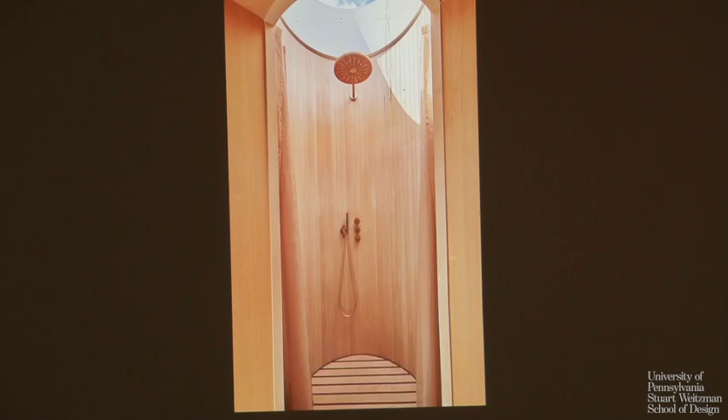It's essentially a piece of decommissioned infrastructure that has now become the home of my family in Copenhagen. I spend 3 months of summer on the houseboat, and I sit here where cars used to park, and I look out. I see the sun setting over the King's Palace, and in the morning I see the sun rising over CopenHill, the waste-to-energy power plant that we built, which makes me feel like a very significant citizen in Copenhagen.

And CopenHill is, as Rosanna mentioned, a waste-to-energy power plant that is so clean that the steam coming out of the chimney is cleaner than the air of Copenhagen.

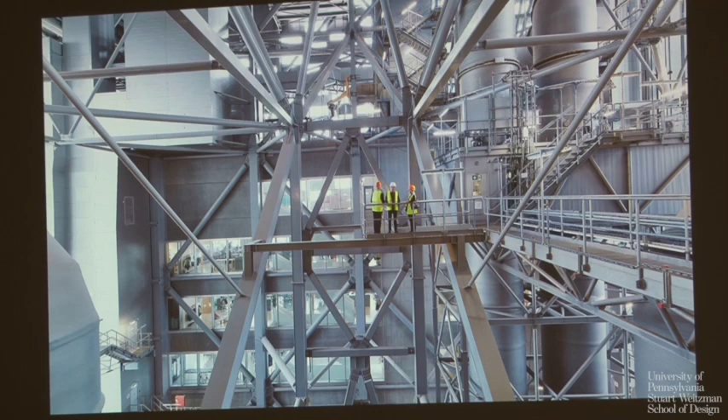So we have been able to turn its facade into the tallest man-made climbing wall in the world. You need to be a pretty skilled climber. You can also ride the elevator inside and admire all the technology that scrubs the particles from the air, and get to the roof, which is a man-made mountain meadow where you can hike and downhill ski.

Denmark got 0 medals in Sochi and in Beijing. I hope eventually we can change that statistic now that the Copenhageners can practice at home.

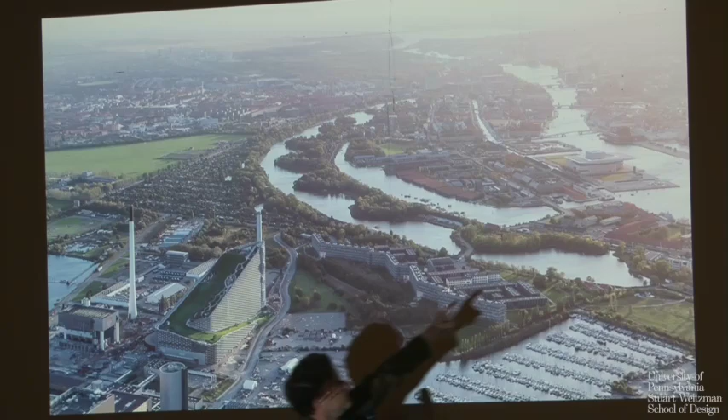And then it's really a substantial part of the landscape of Copenhagen, and this is my home. I like this idea that one of the 2 main landmarks of Copenhagen is the Little Mermaid, and the other one is a facility that turns the waste of society into clean energy and district heating, and that you can hike and ski on.

And it's part of this idea that Rosanna also mentioned that we call hedonistic sustainability. Essentially, the sustainable city or the sustainable building is not only better for the environment, it can also be much more enjoyable for the people that live in it.

And it's an idea we stumbled upon with our first project a quarter of a century ago. We opened the Copenhagen Harbour Bath, and on the opening day we saw the citizens of Copenhagen jumping into the water in the middle of the city. They didn't have to drive their cars for hours to get to the Hamptons. They could actually jump in the port in the middle of the city.

And we designed the harbour bath in Aarhus, and it became clear that a clean port is not only nice for the fish, it's also amazing for the citizens of that city. And it became this idea of hedonistic sustainability that we've been pursuing in various ways ever since.

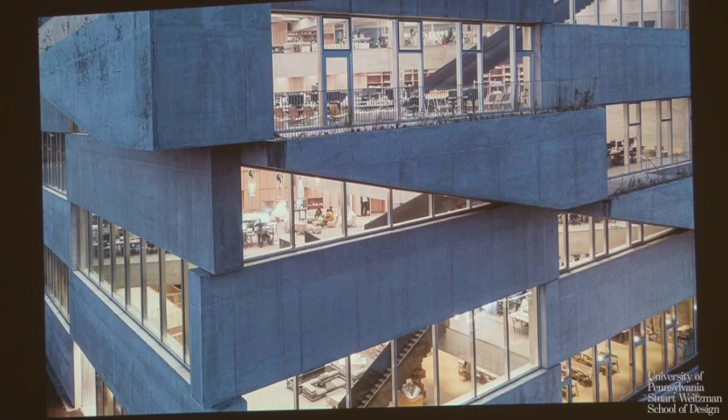You can walk, and people from the neighborhood come and they climb the building, and they end up sometimes on our roof terrace, which is fine. Eventually, sometimes we need it ourselves, but it somehow makes it part of the urban space. And inside, we try to imagine what kind of a work environment would we like to have. We came from a large Carlsberg factory, a beautiful space, tall ceilings and one level.

Here we have a footprint of less than 10,000 square feet, so we'd have to be at least on 5 levels, but we decided to make it 7 levels. Each floor has a third or half open space, open to the floor above or below, so throughout the entire space you can always see your colleagues beneath you and above you.

A good environmentally performing envelope in Scandinavia would be roughly 40% transparent, 60% opaque, to avoid excessive heat loss or thermal gain in summer. Normally that becomes a diffusion, a dither of open and closed small windows. Here you have these 60-foot long panoramas, and then 60 feet of pin-up space, except maybe that one.

As you travel up through the building, you get these incredibly framed views of different scenes from the city, like here looking at the windmills and the bridge to Sweden. You can see the diagonal of the terraces traveling up along the building. The floor plan is 120 by 120 feet, and because it's wedge-shaped, one of the facades is only 60 feet, but that meant the diagonal spans, some of them, are more than 120 feet.

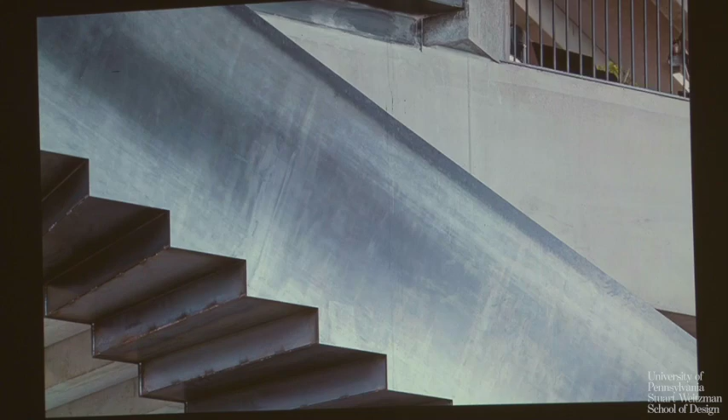All the stairs and guardrails are made out of hot-rolled steel, and you could say there's almost a fatwa against paint and drywall in the building - every material is what it is, chosen for what it's good at. So the building becomes this constellation of materials that have color and texture, with tectonic evidence of the different processes used to manipulate and process it. On the journey up through the building, you always have the north wall, the wooden shelves with all the support functions.

And you end up with these kind of framed views of the surrounding city, where you can see that you are in a living, breathing, dynamic space of a port. And of course the warmth of the shelf as this continuous element to the north, where you have all the cold light, you have the warm material.

You can see the model workshop. It's probably one of the nicest model workshops, at least in Denmark. Sometimes you find them in the basement - here it has sea views, the container port, and finally on the roof.

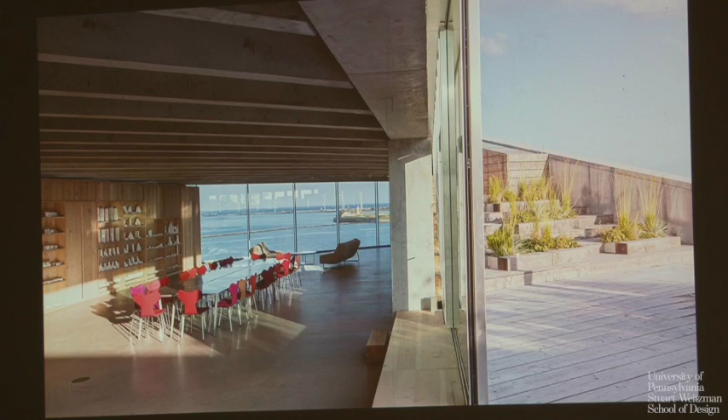Originally, I was planning to live here in the penthouse. My girlfriend hated the idea of living on top of the work. She may have had a point, but when she saw it finished, she probably regretted that. So instead, it's now a space we keep for special projects or special happenings.

We try to not just plaster it with desks. And since we are an architecture school, another little nerdy detail: normally you would prioritize level-free access to the outside, but because we are hitting the maximum envelope, we decided to keep it simple. So we put all the insulation on top, which means you have a window the height of a lazy bench that you walk into, and also a bookshelf underneath.

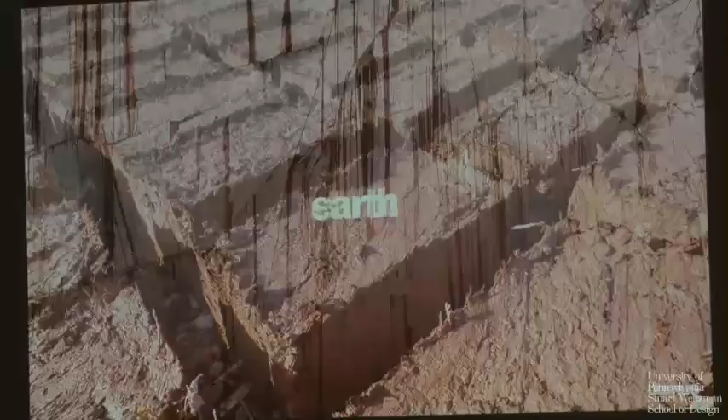The year will be a journey through stone, earth, concrete, metal, glass, wood, fabric and plastics, plant, and then resource — the idea that sometimes we mine the built environment to make new built environment — and the immaterial. We thought it would be strange and anachronistic to make a whole season without touching on AI at any point.

And maybe just as a teaser — it's kind of funny, I was speaking with Winka before about this — maybe it's also the fact that if I had been given a guest editorship when I was in my 30s, I would have tried to put my own projects into every issue. But I think the fact that I'm now at this next stage in life, it has been such a joy to look out into the world, as we always do, and actually identify things that captivate us.

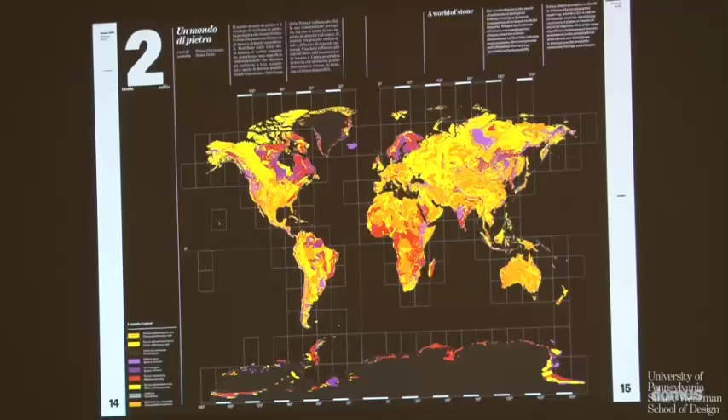So the issue has this kind of genealogy of the use of stone, some of the most interesting current uses of stone, a map of the world seen through the lens of stone, and a library of the different stones and characters.

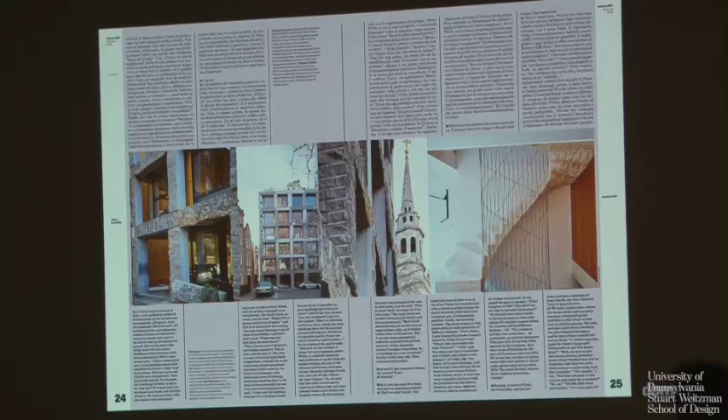Steve Webb, the engineer, talks about the use of structural stone in contemporary construction. I went to visit Amin Taha and Groupwork—an incredible practice in the UK. Their Clerkenwell building, which is also their offices, has a load-bearing structural stone facade, and they're basically rediscovering stone as almost carbon-free.

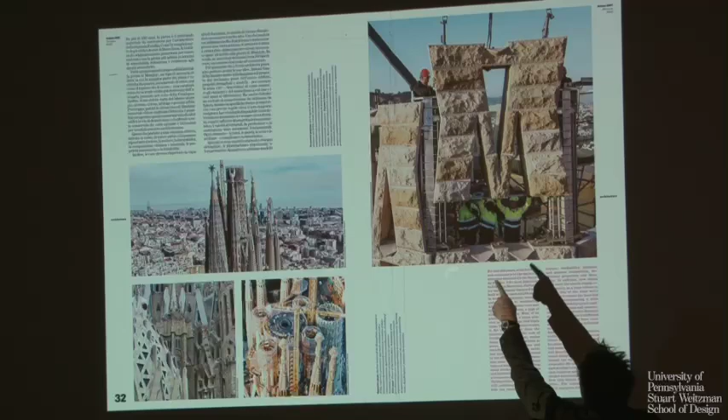If it's locally harvested and you use electrically powered machines to harvest it, it has almost no carbon footprint. I went to visit the construction site of Sagrada Familia, which is, of course, the oldest building but still under construction. Today they're using pre-tensioned solid stone as construction. During the 70s, there was a moment where they built with concrete—it's definitely the most beautiful construction site I've ever been to in my life.

This French architect, Perraudin, who built in a kind of classic modernist vocabulary, but using solid stone as the load-bearing material.

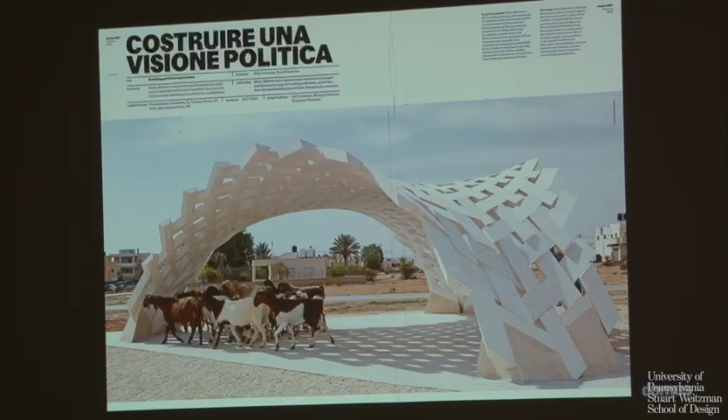Stone Matters, a Palestinian group that uses solid stone, and Jerusalem stone, which they believe has become a political element in Israel, the West Bank, and Gaza. Again, it's about using sophisticated technology and radically different geometries to use stone instead of steel or concrete.

A Polish graveyard made with stone bricks, a beautiful square in Italy, and two contrasting projects—one that takes advantage of the raw, unformed nature of the material, and the other that uses sophisticated technology to create this incredibly organic, almost Art Nouveau result.

We commissioned 10 photo essays by Laurent Guénitou, the photographer, who in this case documented the journey of the pink marble for the Perelman Performing Arts Center for Rex. This is my old friend and colleague Joshua Ramus from Rex. When I saw his facade, I said he managed to turn his OCD into a creative outlet.

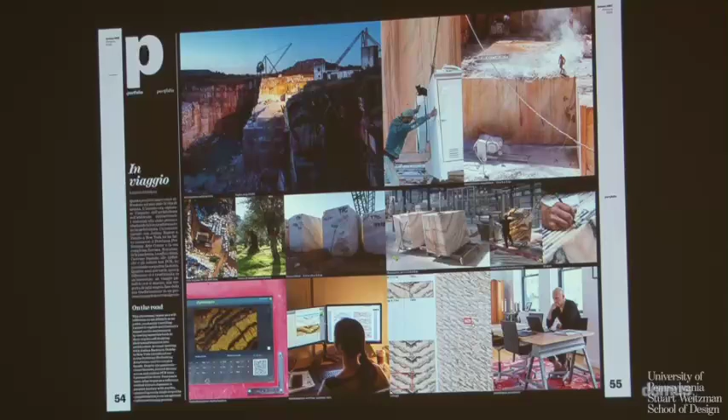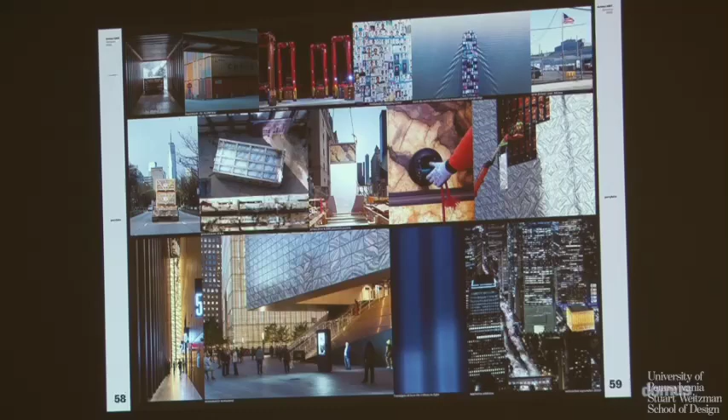Essentially, the stone has been harvested, it's cut so thinly, then it's photographed with front light and backlit. It's organized into these patterns, which is where the OCD becomes handy. It's then laminated between layers of glass, laid out in panels, sailed across the Atlantic Ocean, and driven into Manhattan—now a spectacular, beautiful little building between the legs of the World Trade Center towers.

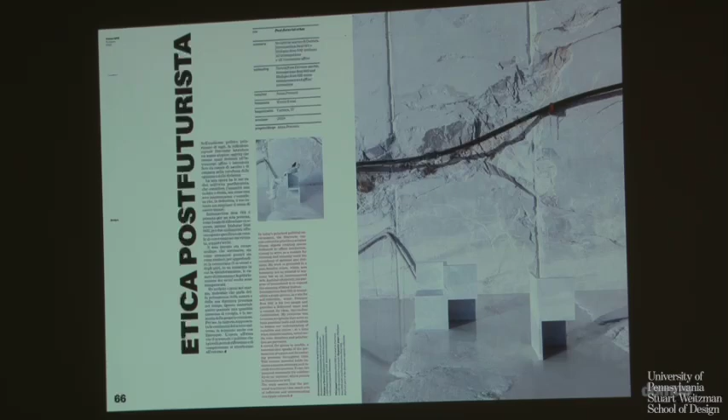By looking at the stone and manipulating it, it gets this kind of almost surrealist nature. And finally, since material is the subject and the protagonist, we thought the cover should be a celebration of the material. We ended up persuading Domus to make the cover just a photograph of a gorgeous piece of stone. Then, in the absence of graphics, the title of the magazine is engraved like the Ten Commandments into the surface of the stone.

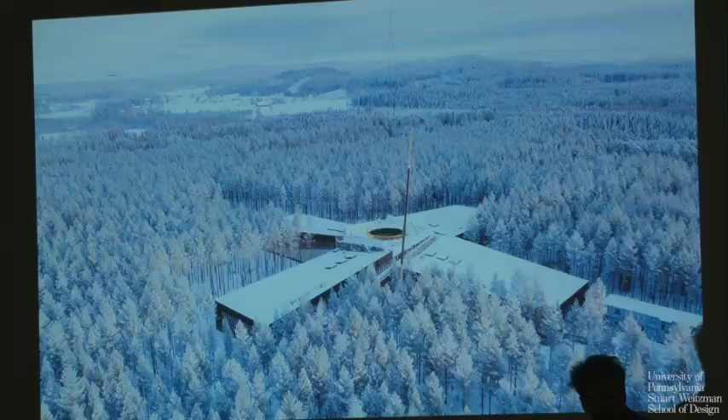So maybe back a little bit to some of the work we do. We've never been very materialistically fundamentalist in our practice, but we, in the pursuit of trying to enhance the environmental performance of our buildings.

One consistent pursuit lately has been the use of timber. In the absence of other solutions, there's also advances using cave bacteria to digest limestone into cement instead of energy-intensive furnaces. There's a lot of movement happening in carbon-free steel, carbon-free concrete, etc. But right now, the simplest way to reduce the embodied carbon footprint of your building is to make it out of wood.

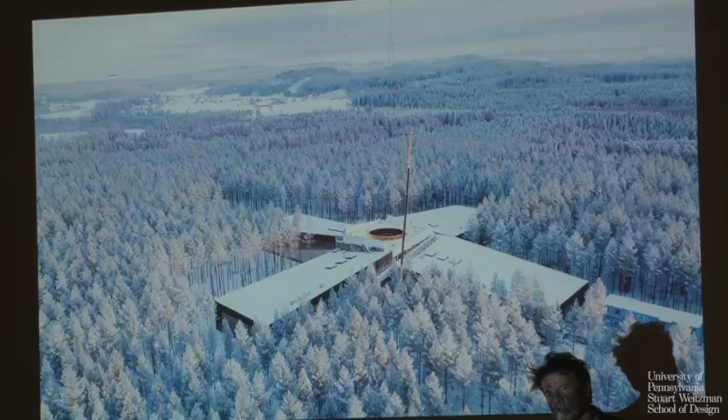We built the Plus in Norway, which we believe we have a claim to being the most environmentally friendly factory in the world. It's made from locally sourced timber, charred on the outside for weather protection. We negotiated with the fire department that we didn't have to cut down more than 15 feet offset around the building, so we can actually use the evergreen pine trees outside as sun shading for the facade.

So the factory workers are making outdoor furniture for the Vestre furniture company inside a forest. The factory makes woodwork and paint, so the two materials you see are color and timber. And this is not a veneer or a finish—it's the load-bearing walls, the load-bearing columns, the beams, the slab of the roof. So what happens when you build a building out of mass timber is that the bones of the building, the raw structure, is already beautiful.

The administration is located around the central courtyard, and the building is actually part of the whole factory complex. It's publicly accessible, and you can climb the roof and descend into the courtyard and see everything they do inside. They said they're not afraid of industrial espionage, because if people start copying them, then the industry is going to get more clean.

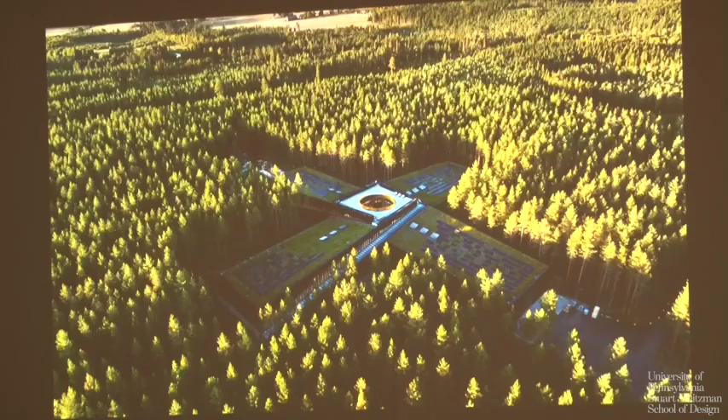The roof is covered by a mixture—the building is heated and cooled with geothermal, powered by local hydroelectricity, supplemented by photovoltaics. The roof is covered in locally sourced turf, and we literally moved the ground cover to the roof, including elements that make it successful as habitat. So it has the same amount of habitat after the building was built as before.

Around the corner on the Arctic Circle in the north of Sweden, we built a one-room hotel, or actually a one-room hotel for humans and 350 rooms for birds and bats. It's a tree house, and we worked with a local ornithologist who gave us a perfect index of the different birds and bats that breed in the area, and then gave us the respective designs.

There's 17 different kinds of birdhouses for the different birds. So you wake up to the tweeting of birds, you shower with a squirrel, and you are surrounded by nature around you, beneath you, and above you. It's even ADA accessible because we're taking advantage of the slope of the site, so you can just roll into it.

So a project like that, of course, doesn't really make a dent in the global carbon footprint, but maybe this project has more significance in terms of a declaration of love to nature.

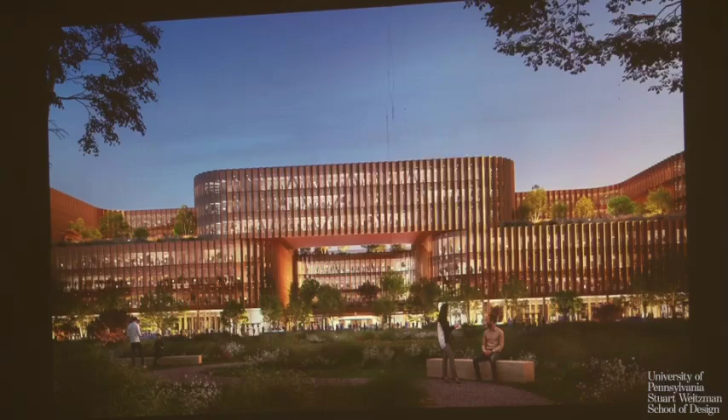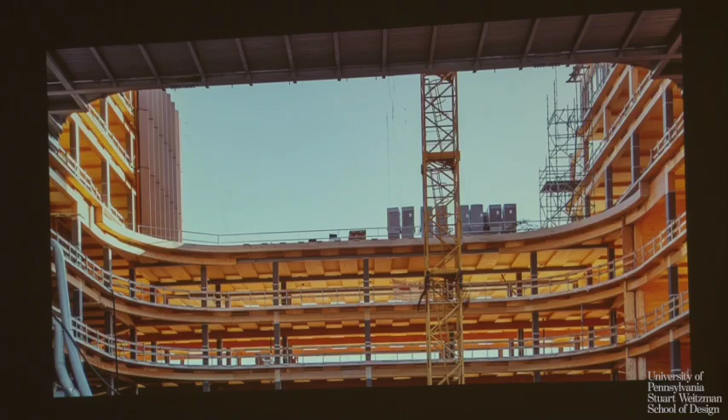On the other end of the spectrum, we're just finishing an extension of the Luxembourg airport. These are renders—it's a 900,000 square foot building that's built 80% out of mass timber. For anti-terror purposes, the ground floor had to be concrete, but everything above is timber. It's this kind of 80-20 approach, where timber is great for a lot of things, and again, you have these gorgeous exposed ceilings.

The columns are actually timber, but they're just covered by cardboard to protect against the weather. But because you have these long spans over the courtyards, 3 levels that span across a courtyard opening up to the tarmac, some of the members became too girthy in timber, so they've just been surgically replaced with steel.

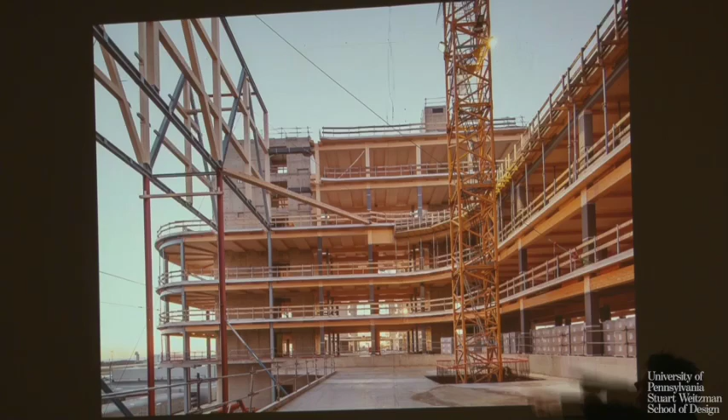So you can see that most of it is timber, but in the beam, the bottom has a lot of tension, and some of the diagonals that have an abundance of tension have simply been replaced—almost like a pirate with a wooden leg—simply because in that case, steel was better at the job.

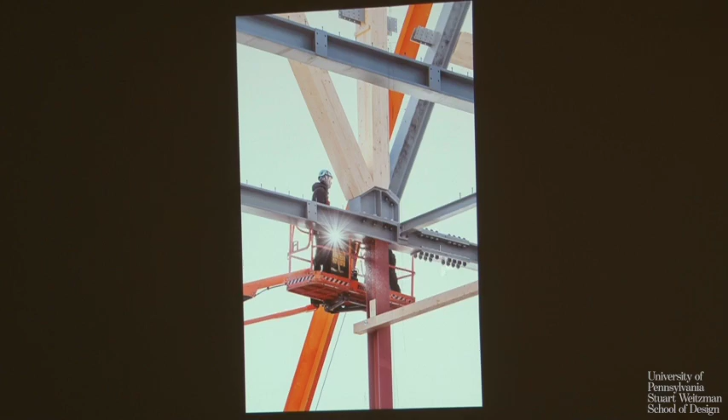I think this pragmatic approach actually allows us to make a very large-scale timber building, where for necessity, vertical egress cores and the ground floor are concrete, a few members have been replaced with steel, and the rest is essentially an enormous timber structure. Building on that experience, two years ago we won the competition to design the new airport in Zurich, which will be the largest timber structure on planet Earth.

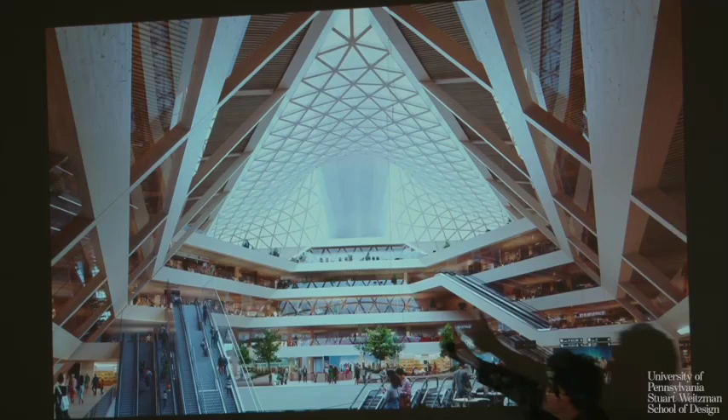I would call it timber brutalism, because everything is kind of this heroic space frame grid that you walk through as you travel through the terminal. The dimensions are almost 3 by 3 feet, locally sourced pine, and the only thing that isn't timber is the control tower that stands like a campanile in the middle of this three-dimensional space where all the different flows of people pass each other in 3 dimensions. The control tower actually lifts up the skylight, so the skylight becomes the control tower. And the roof is covered in photovoltaics, powering two-thirds of the airport.

And of course, as an architect, you're always nervous—what vicious nicknames are they going to come up with for your building? But in this case, it's the espresso coffee pot, which I think is nice if you like coffee.

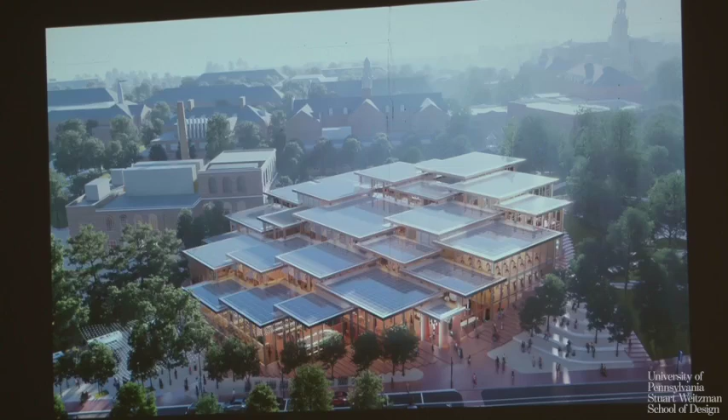And in this case, you saw the photovoltaics on the roof, which I think is about finding ways to integrate active power production as an element of the project—a challenge that I think as architects we should take on our shoulders, to find aesthetic ways that these environmentally performing elements don't just become sophisticated machinery on a technical roof. They actually become integrated in the energy performance, but also the aesthetic performance of the building.

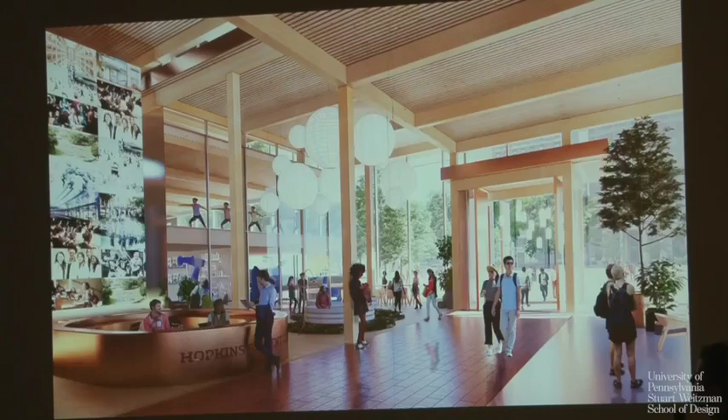For Johns Hopkins in Baltimore, we're designing the student campus center that just topped out, which is essentially a series of timber tables with photovoltaics on top, climbing a 4-story hill. So it's a 4-story building where every level is directly connected to the outside. You can enter it from any angle, from any elevation. And inside, the timber not only dramatically reduces the embodied carbon footprint of the building, but also becomes this beautiful, light, almost cozy environment, even though everything you see is actually the load-bearing structure.

There is no material finish applied. Everything is hard-working pieces of timber.

For Google, we created a few pavilions for their headquarters in Mountain View. The beautiful landscape, when you look closer, is actually a series of root zone gardens. So all the wastewater, all the rainwater that falls on the building is captured and used to irrigate the landscape. And all the black and gray wastewater from the building goes through these root zone gardens before it's let clean into the San Francisco Bay.

The roofs are covered in photovoltaic panels. The Googlers call them dragon scales. But essentially the entire material of the building is converting photons to energy, except for all the clerestories.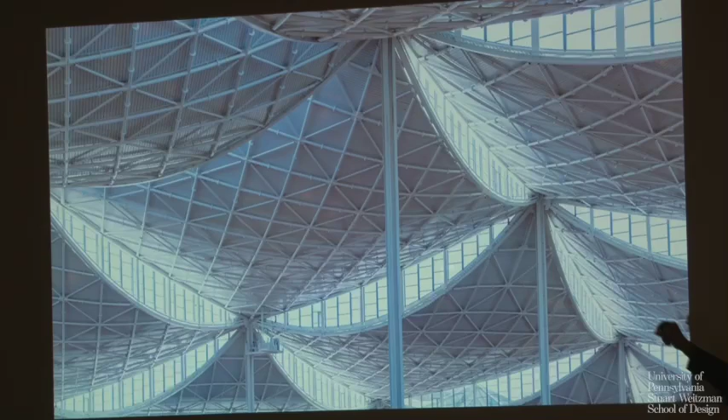The structure, the steel structure, is a grid shell that has a catenary curve, because the catenary curve is the most materially efficient way to deliver a long span with minimal use of material. That's why the roof can be so incredibly thin—it's basically just the insulation. And the smiles, these clerestories, are proportioned to bring in the perfect amount of daylight for this kind of marketplace for engineering and creativity.

And maybe lastly, around the corner in Vegas—you wouldn't normally associate Vegas with environmental performance. Although in Vegas, we learned, they basically have an abundance of solar energy with solar farms in the desert, and then of course they have the Hoover Dam.

So our original idea was to cover the entire—this is our proposal for the Vegas A's, the baseball team that used to be the Oakland A's, now moving to Vegas. We actually spent 5 years of our careers designing their headquarters, their ballpark in Oakland. And after 5 years, they couldn't reach an agreement with the city and moved to Vegas.

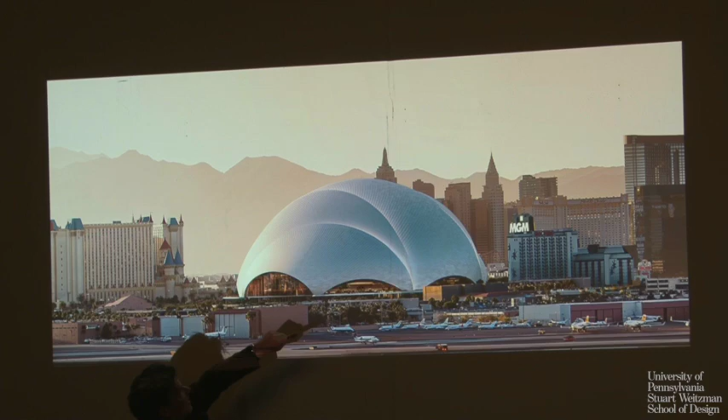It has to be enclosed, so we designed it like this kind of arched dome, so you get height for the baseball, you get these materially elegant spans. To the south, it's entirely opaque. To the east and west as well, and only to the north you have these arched pennants or ribbons that open up, allowing daylight, cool daylight to come in, allowing views from the strip.

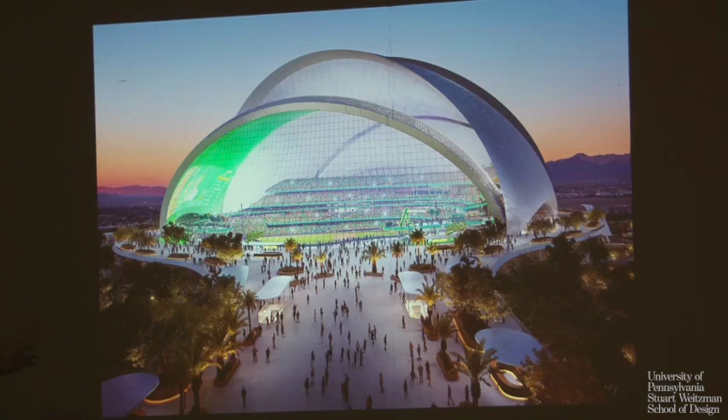You have MGM, Excalibur, and Hotel New York-New York, that can actually see the energy on the field. And from the inside, you get this enormous framed view where the energy from the strip can come in and be part of the experience inside.

So somehow the architecture—I like to say that it looks like the sphere swallowed the Sydney Opera House. The architecture is essentially designed to keep the relationship with the environment, get the daylight in, but omit all of the thermal exposure and glare.

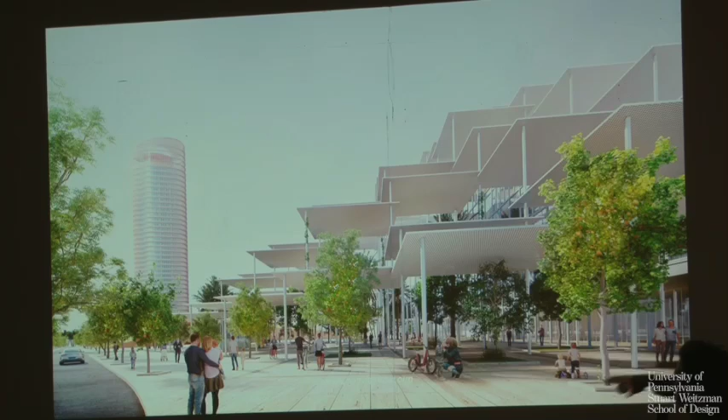The last one is for the European Commission. We're designing, as part of the new European Bauhaus, the environmental agenda of the EU and the built environment. We're designing the Joint Research Center for Environmental Construction in Sevilla, the sunniest and warmest city in Europe. It's half public square, half European Commission, essentially a cloud of shading pavilions that shade an outdoor square, naturally ventilated, with water elements to provide evaporative cooling.

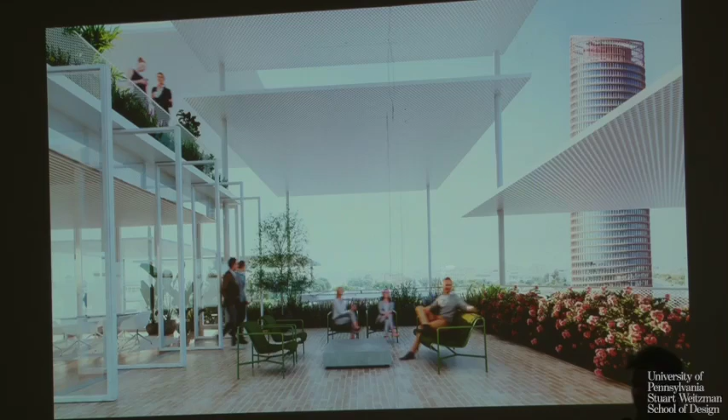But it allows us to make the entire facade transparent because the square is already shaded. There's an abundance of daylight, but no direct solar exposure and glare, so you can actually see what the commissioners are doing inside, and you get enjoyable outdoor spaces. As a result, the building produces twice as much power as it consumes, so it's actually part of the energy utility company of the city.

A year ago, I had the honor to speak at the Vatican as part of a European engagement with the Vatican, and Ursula von der Leyen, the president of the EU, met with the Pope. And if you ever get invited to visit the Pope and wonder what to give him, he already has a framed photo of the Joint Research Center.

I'm not a Catholic, but if I was, this could be my ticket to go to heaven. And maybe...

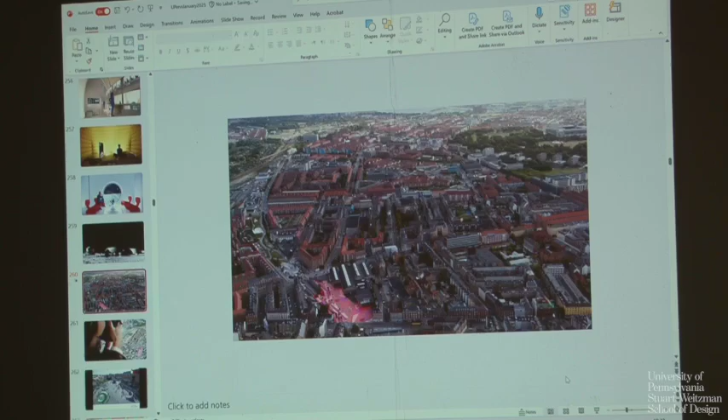But maybe since we did mention a little bit—the sunshades again—there was a little bit of mention of Bhutan. I had no idea how long this talk was. I never spoke about domes before. That's like a whole lecture on its own. But you know, there's a few cool projects in here.

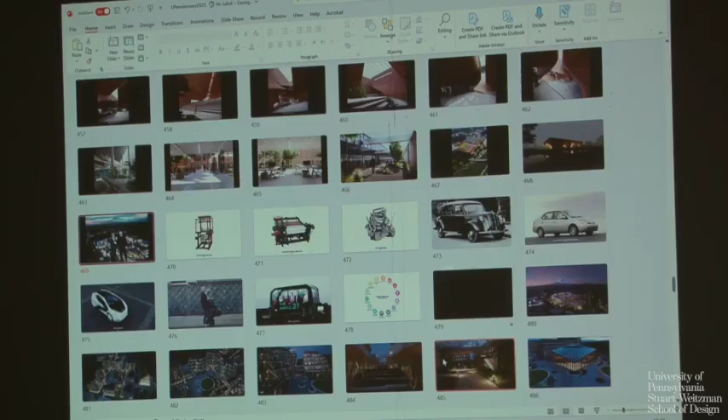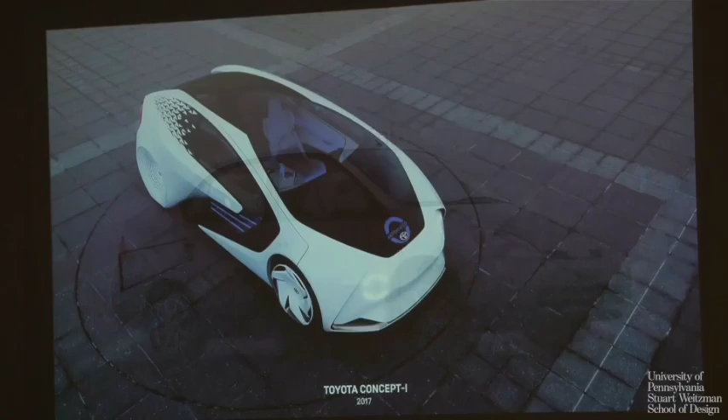This is actually the president of Toyota. In 2019, I met him and he told me that Toyota used to be a loom maker. Then when the automobile came, they became so good at making large machines that they became the largest automaker in the world. They were the first producer of mass-produced hybrid cars. He realized it was time to pivot again—they could not just be a car maker, they had to become a provider of mobility as a service. And he wanted a living laboratory for urban mobility.

We worked with him to study the city. Today the city tries to do everything so it becomes good at nothing, because everything is dominated by cars. So we thought, what if you have three kinds of streets?

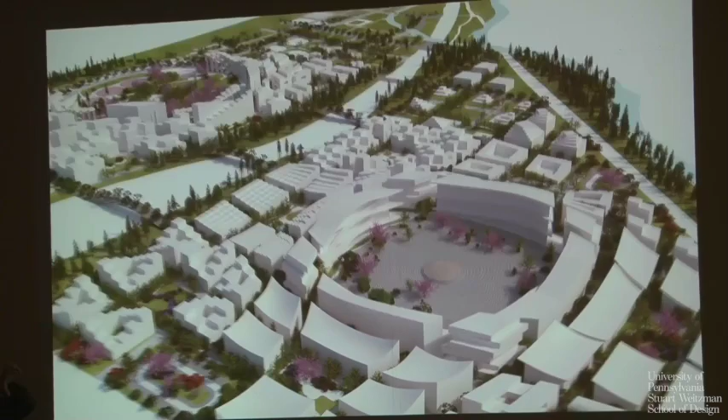Streets with autonomous cars and pedestrians, like on the street, promenades for personal mobility and pedestrians, and parks where you can only walk. And then we take these three kinds of streets and we weave them together in two directions. So you create a city fabric where you can get from anywhere to anywhere in a driverless car, on an e-scooter or a bike, or walking through a park.

And of course, we try to use environmentally performing materials, photovoltaics. We capture geothermal energy. It's close to Mount Fuji, so there's volcanic activity in the ground. And in this space...

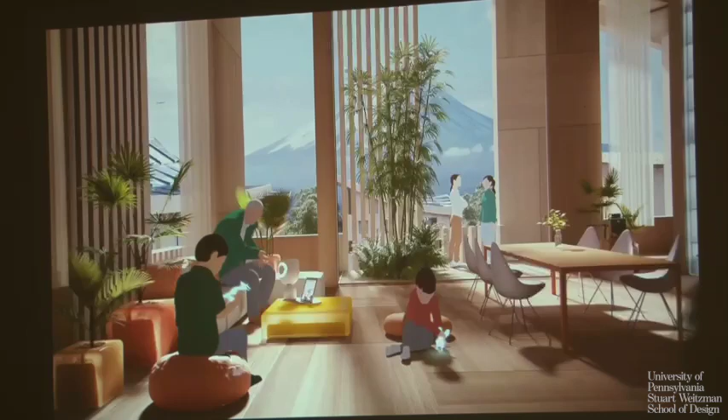Toyota can work with their collaborators in different technologies to orchestrate and experiment with the complex interactions of different kinds of movement. There's fuel cell technology with hydrogen. There's a Matternet where goods are delivered straight into the homes. The homes have domestic robotics of various kinds, beautiful views of Mount Fuji.

And what I like about the project is that we got commissioned by a car maker to imagine the city of the future, and the result ended up being a city where we take two-thirds of the right-of-way that is normally surrendered to the automobile, and we open it up for more interesting forms of life, not only urban life, but also plant life and animal life.

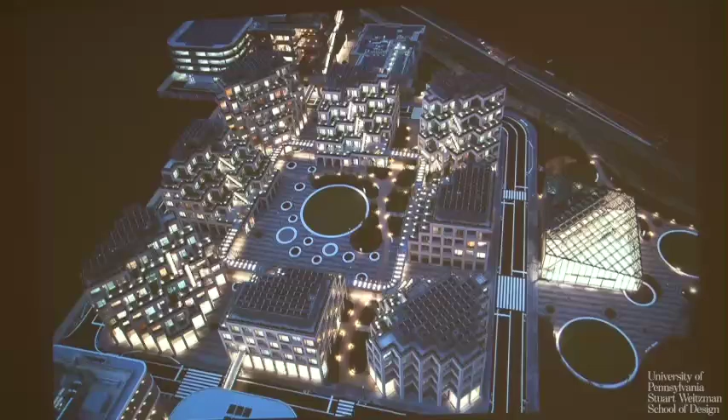So we presented this project to the world after a year of collaboration in January 2020. And of course then COVID came, so I couldn't travel to Japan for a year and a half. But we broke ground and phase one just recently opened. The first couple of city blocks. We designed the entire public realm, and we're designing some of the buildings for phase two.

Even though it's called a city, woven city, it is more like a neighborhood.

But last year, like a year and a half ago, I was invited to a dinner in Copenhagen in honor of the King of Bhutan. And I ended up sitting next to him, and he said that he was at the coronation of King Charles, and he said he just swung by Copenhagen because he actually wanted to speak with me about a project he was looking into. So he invited me to come to Bhutan because he wanted to create a new city.

Bhutan is famous for its gross national happiness. It's a tiny country, less than 1 million inhabitants, surrounded by China on one side and India on the other side. They are experiencing, despite all of their successes as a country, a sort of brain drain, where a lot of the younger generation is going to Australia primarily, and Canada, to pursue economic prosperity.

I went to Bhutan, traveled around, and Bhutan is, on the surface, very different from Denmark. It's the most mountainous country in the world. Denmark is entirely flat, more like an archipelago. The two countries have the same size, and Denmark often ranks highly on surveys of self-reported happiness, normally competing with the Finns, ironically, as Finns don't come across as particularly cheerful.

In Bhutan, they measure their success as a nation in gross national happiness. We're both powered by renewable energy, windmills, and hydroelectricity in Bhutan. Of course, the main landmark of Bhutan is the Tiger's Nest.

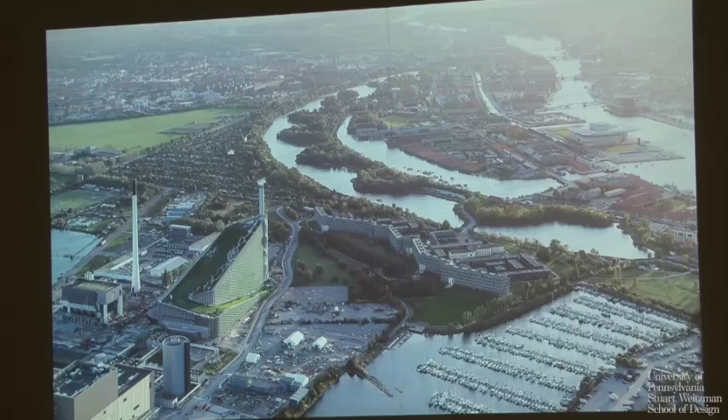Well-being is such a high priority in the country. It's big into the gross national happiness index. And it's very safe. The trusted political system, the respected monarchy, good foreign policies and peaceful geopolitical relationships with the neighbors makes it a very safe and trustworthy place.

So we thought, since they are already measuring gross national happiness in these 9 parameters that are all based on Vajrayana Buddhist principles, why don't we take these 9 parameters and bake them into the design principles of the city. So the mindfulness city is a city that is shaped by the nature and the rivers that surround it, and rooted in the local traditions and wisdom. It enhances agriculture and nature rather than displacing it. It is powered by the flow of the rivers. It is embracing collaboration and togetherness, and it is designed to attract foreign investment and retain local talent.

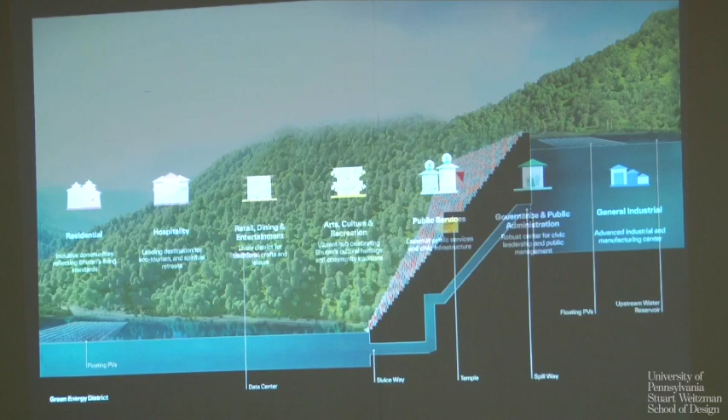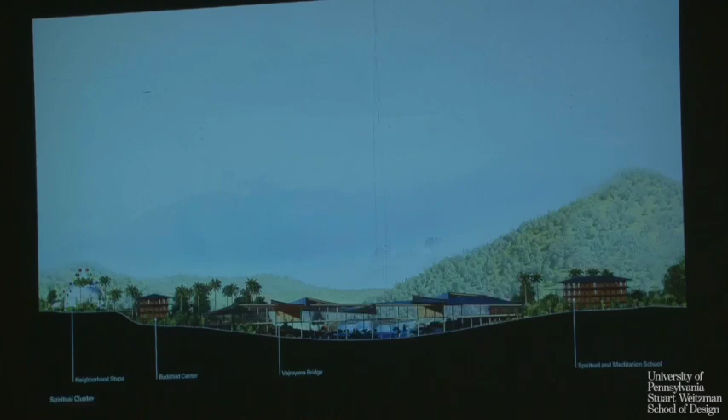When you look at the master plan, a major hydro station is going to power the city, also powering data centers, the water storage for floating PVs, then health and wellness neighborhoods in the highlands, taking advantage of the beautiful nature, the tropical landscapes, spiritual clusters, meditation, spirituality, Vajrayana Buddhism, manufacturing, agro-tech, forestry, and then education, financial districts, and finally a dry port with rail to India and an airport connected to the entire world.

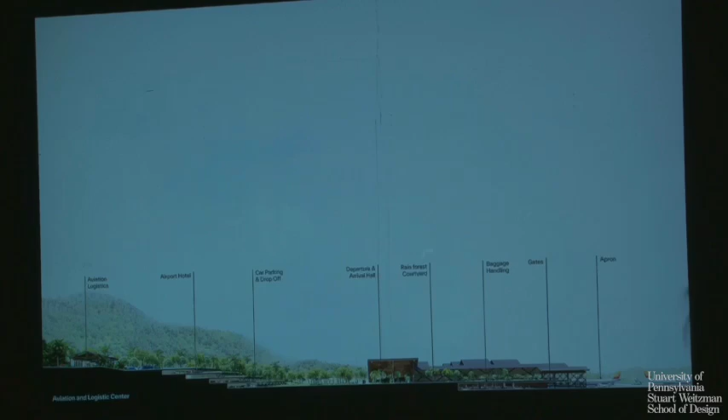Gelephu right now is on the border to India, and you can only reach it with small planes. Once we finish the airport, 5 billion people will have direct flights to Gelephu. You can see it - Bhutan, when you look at this map of 5 billion people, is sitting smack in the center. Potentially, it could be a gateway to South Asia.

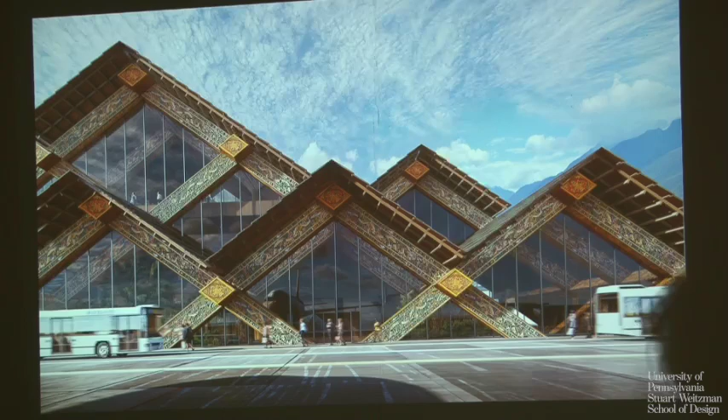The existing airport is the first project that we're taking on and realizing. We're devising this kind of modular architecture so that it doesn't become a Frankenstein like most airports eventually do, but the spirit of the architecture can expand and extend using locally sourced timber and bamboo, anchoring it in the beautiful architecture of Bhutan today. The modularity makes it both industrially manufacturable and also matching the existing crafts. So this is Bhutan.

The mindfulness city is 2,500 square kilometers, and the urban areas in the middle are located around the airport. But just like the country, it's covered with 80% forest. So we thought maybe since an airport is the first impression you get of a city, we could basically bring the forests that come down along the two rivers into the arrival and the airport itself, also becoming a divider between arrival and departure.

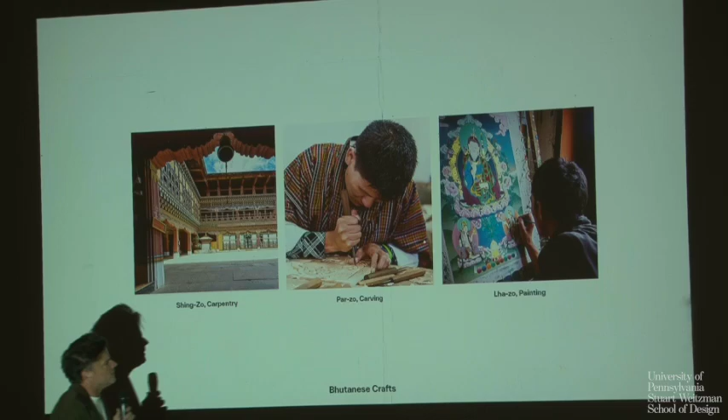You have this kind of shaded arrival square, and you enter inside, and the rainforest courtyard becomes part of the experience. As you arrive, maybe finally - they still have 8 large craft schools where they educate woodcarvers, painters, stonemasons.

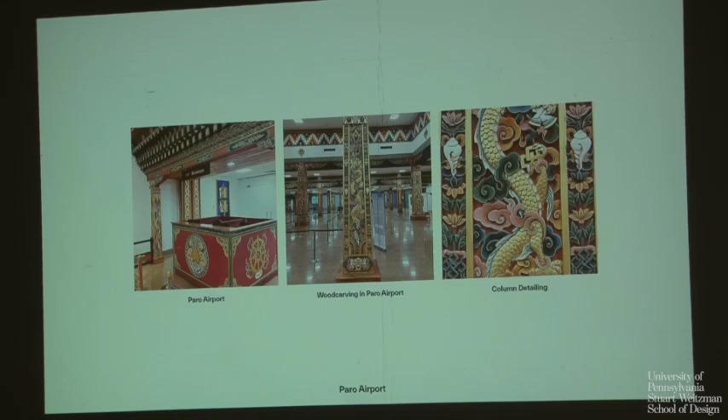So as I've been traveling there, I was there on my 6th trip in a year and a half. Slowly but surely, I've been infected by the kind of beauty of this, and in the end, I realized that we simply had to embrace this craftsmanship, the painted wood structures that you see. Normally I would dismiss it as pastiche, but because it's still a living, breathing part of their culture...

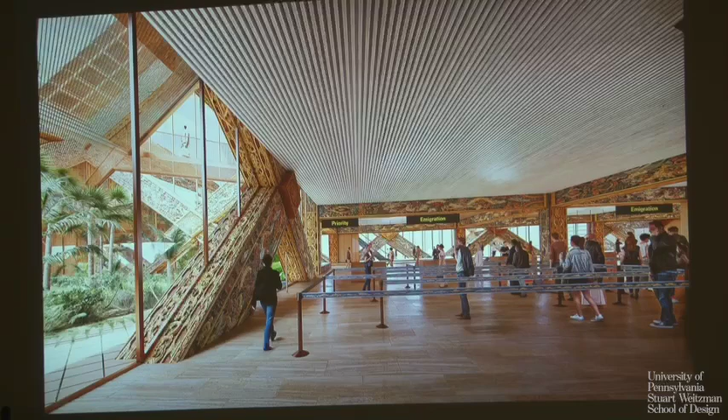I told my team, because we were working on this idea with the formation of pitched roofs, that we had to do this, and they kept hearing what I was saying, but somehow I think it didn't arrive all the way to the fact that I actually meant it. Finally, I said no, we have to. And when we started doing it, in the beginning we were almost giggling. But then I think it has somehow elevated the project to something completely extraordinary, because this is not fake.

This is how Bhutan is today. So when you land, not only are you immersed in the nature, but you're also surrounded by all these kinds of cultural artifacts and expressions of the city. The lounges are bridging over the rainforest courtyard, and you see the mountains on the horizon. Essentially, arriving, you'll be waiting for your luggage in a jungle. So welcome to a different kind of city.

And then, of course, maybe just touching on the highlights of the structure, it became clear to us that this city really has to be shaped by the nature and the landscape it inhabits. So the 34 rivers that flow through the territory ended up defining the city.

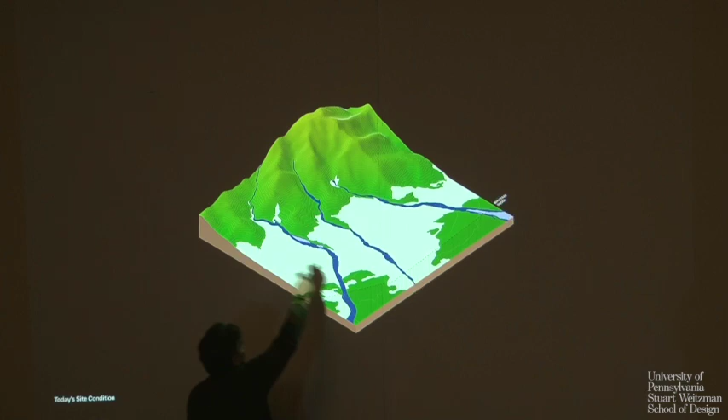The rivers are seasonal, so they go substantially up and down, and they are also like ecological corridors, allowing the elephants to migrate into India. So we decided to protect and preserve the rivers as ecological corridors, so they become like central parks flowing through the city. Then you have these smaller linear parks where you have gravity-assisted natural water management.

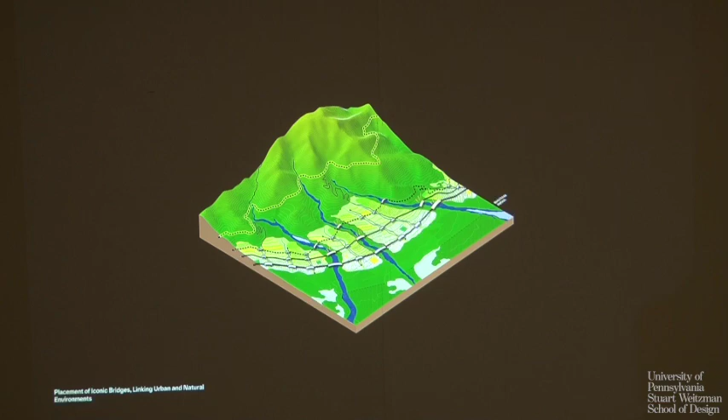Each neighborhood becomes like a paddy field cascading down the gently sloping hills, and the city densifies as it approaches India. You have these 3 main transportation corridors for public transportation, and where they cross the rivers, they become bridges, and the bridges become public institutions—a bridge from one side to the other, but also a destination in their own right. The central area as it stands today, and the kind of future with the expanded airport and the dry port.

You can kind of sense this European scale, maximum building height of 6 to 8 floors, and you can see these local parks and then these major central parks along the main rivers.

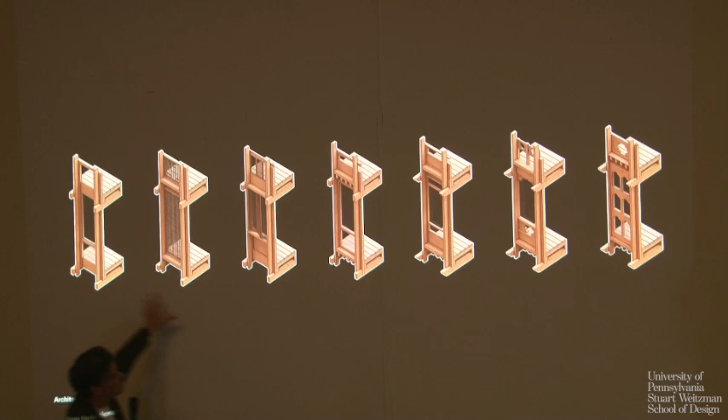We've been working with different groups of local architects to combine tradition and contemporary design, highlighting locally available materials including river rocks, bamboo, timber and rammed earth. We've been trying to interpret the building traditions of Bhutan and create a catalog from a sort of Calvinist Scandinavian interpretation to a more traditional Bhutanese interpretation—creating a catalog that works for local craft but is also easily applicable to industrial manufacturing.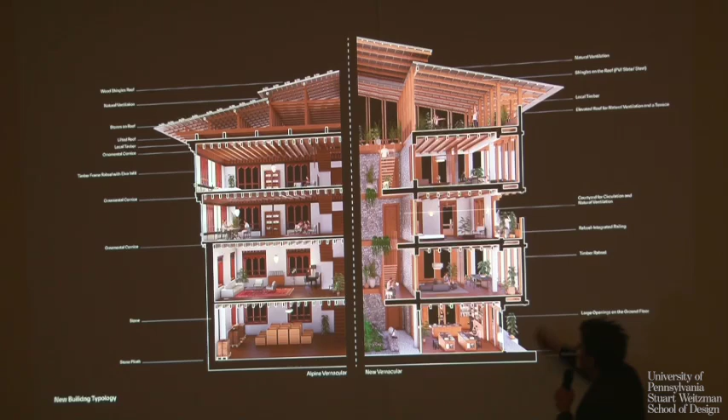The architecture normally associated with Bhutan is actually alpine in nature, so we tried to develop the tropical equivalent, since we're down in the lowlands with a completely different climate than most of Bhutan. We developed a typology with a naturally ventilated central courtyard and a shaded roof terrace to provide natural ventilation—the tropical equivalent of Bhutanese architecture.

For every scale, we've developed different building types for apartments. The awnings can serve as terraces, the courtyard typology with the tall stone wall and the light timber on top.

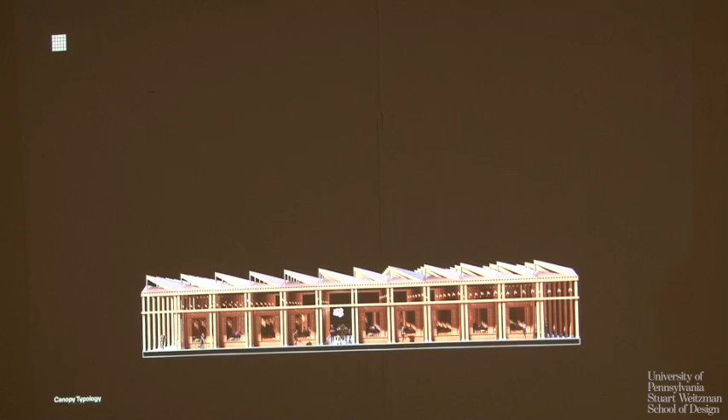We tried to acknowledge the fact that Bhutan is unique in that it still has a living, breathing tradition for craft, down into the craft of building—a kindergarten under a shaded roof, manufacturing under a ventilated shed, and different kinds of courtyard typologies and single-family homes.

So an entire vocabulary to set the tone in the first phases, always using public space as part of programming, always having public spaces on the ground floor, taking advantage of the safe environment. The schools can really use the public space for an extension of teaching, living among agriculture in the highlands, residential neighborhoods, more high-end, along with hospitality and spirituality, meditation centers.

It has geothermal activity, so you can have natural hot springs as part of the wellness experience. And we are extending the existing Bhutanese trail of 400 miles of paths with another 400 miles, so you can actually get to all of the high points in the country along this one pilgrimage.

Then just looking at the city fabric, trying to create a city that resolves all of the contemporary and modern demands of a cosmopolitan city, but using different kinds of passive means. We have this network of tram stations, which is where you have the highest density.

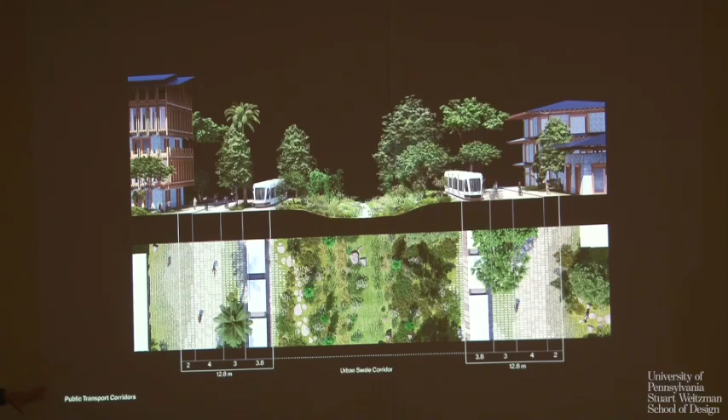You have these bioswales that are green in the middle, with the traffic on either side—a typical street. The pavement is always permeable, allowing the tropical rains to seep directly into the ground. One of the existing main streets of the local town, returning into the Royal Boulevard, becomes a pedestrian space that runs through the entire city and sets the tone in phase one.

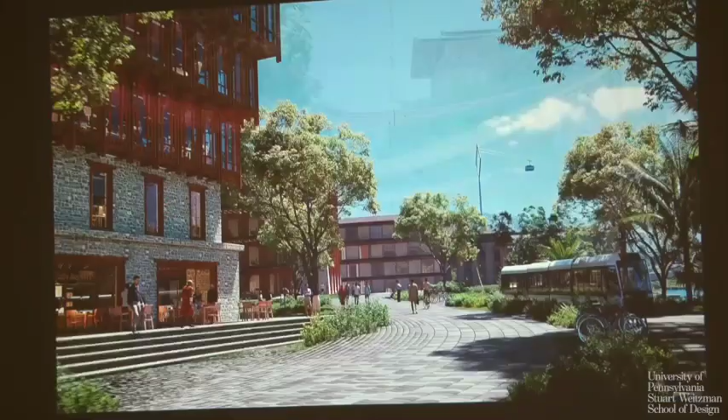This is one of the more urban areas. You have 5 tram lines that connect to some of the peaks, the more urban part, the cars in the middle, and then these permeable local streets, more like alleys. You see traditional and modern architecture completely cohabiting the same space.

Water management becomes an incredibly big part of the project. You need to contain the rivers. Not only are they quite seasonal in the water levels, but also elephants are fascinating, but also dangerous.

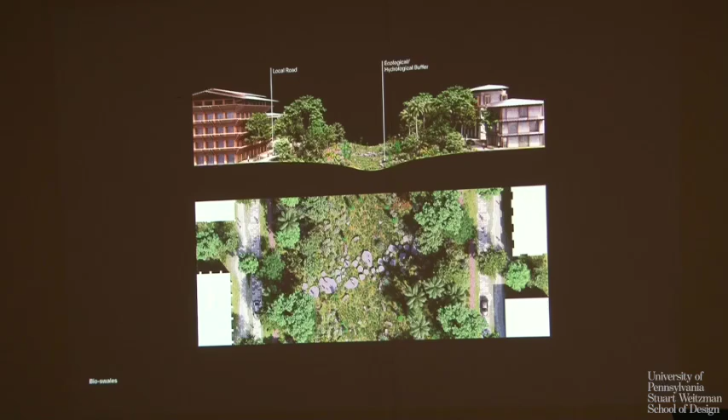So on one side, the wild, and on the other side, the public programs, including kayaking rivers and places for swimming, so that these major river parks really become a major destination for the cultural life of the city—the bioswales that seasonally swallow the tropical rains.

And of course it will have dzongs and stupas and temples of traditional Bhutanese urban environment. But we have designed three main public structures: the airport,

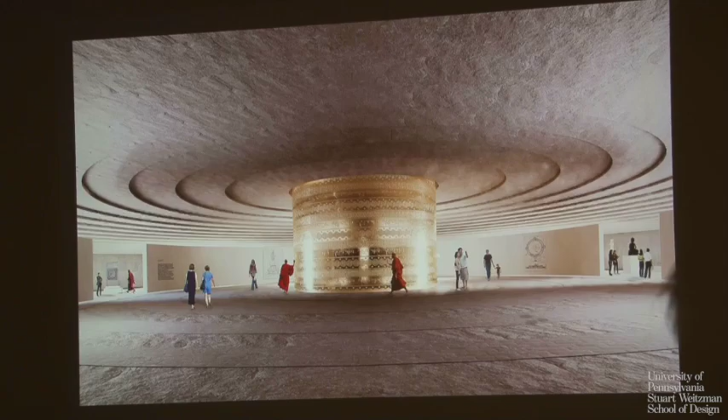phase one, a Vajrayana Buddhist center. The idea is that a lot of people might not feel welcome to enter a temple because they're not practicing Buddhists, and they might do the wrong thing. So we wanted to make a place where foreigners who have an interest in Vajrayana Buddhism can come and experience all the different elements that somehow embody a contemporary interpretation of all the aspects of Vajrayana Buddhist worship, into a contemporary structure.

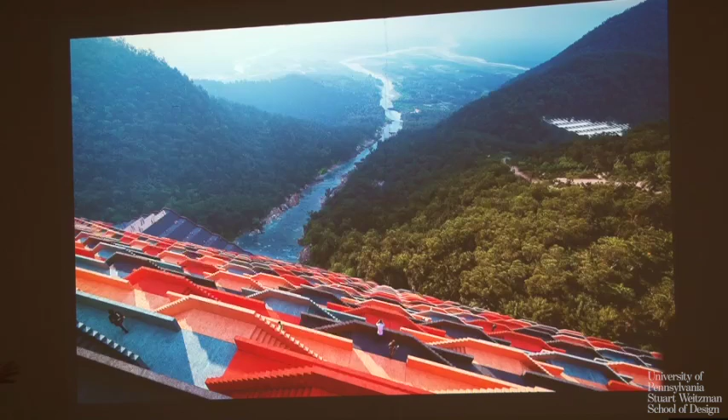And lastly, the entire city will be powered by a hydro station. Since the water flows from Bhutan to India, we got the idea to make it out of prefabricated concrete elements in the different traditional colors of Bhutan, like a Bhutanese equivalent of an Indian stepwell.

So anyone who's made it to the Hoover Dam and stood at the top and thought, wouldn't it be cool to rappel down the face of this? In Bhutan, you can actually descend along the face of the temple dam to the 21st century equivalent of the Tiger's Nest, a temple nested on the face of the dam, almost like a ceremonial procession. There are thousands of different ways to get down and up again.

And in some way, I think it captures all the elements we try to imbue into the mindfulness city: it turns nature into power, it turns engineering into art, and it turns the infrastructure for energy into an infrastructure for spirituality.

One could hope that maybe the Temple Dam could be for Bhutan what the Eiffel Tower is for France, or the Sydney Opera House is for Australia. So to end, we've made a 3-minute film that explains in 3 minutes what I have done in an hour and a half.

In the land of the Thunder Dragon lies a special place where wisdom and compassion have forged a unique way of life. Rooted in the timeless principles of Vajrayana Buddhism, Bhutan seamlessly intertwines spiritual and cultural values with a profound respect for nature.

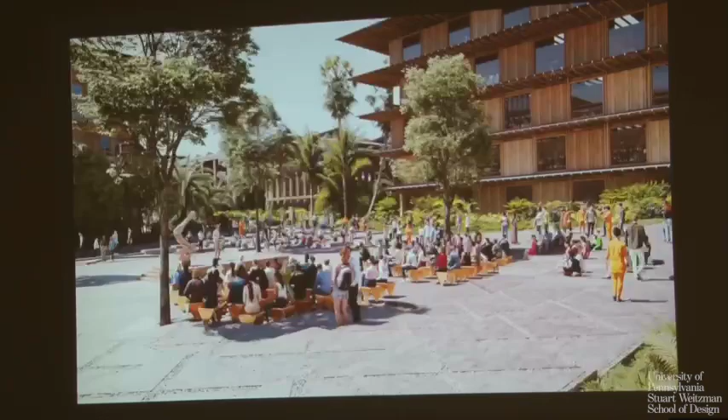A human-scale environment designed to inspire and nurture global talent, fostering a culture of collaboration, experimentation, and innovation. In Gelephu, green and clean surroundings will drive businesses towards sustainability, striking a balance between economic success and environmental prosperity.

Built with locally sourced river stones, timber, and bamboo, the Mindfulness City blends tradition with modernity, preserving heritage while advancing progress and cultivating resilient, self-sustaining communities.

Here nature is enhanced rather than displaced, with every path drawing you deeper into the wild. This sanctuary for spiritual and physical rejuvenation evolves with its ever-changing landscape, integrating infrastructure with social activities and nature-based solutions. A constellation of public spaces will gather residents of the mindfulness city to share a life of learning and happiness.

In the Buddhist capital of the world, people of all cultures will unite and practice compassion, kindness, and inner peace, revealing Bhutan's greatest teachings.

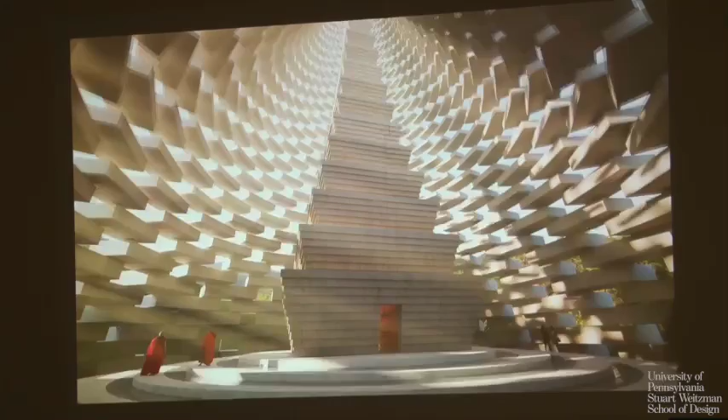Together, we begin a new era of mindful prosperity.